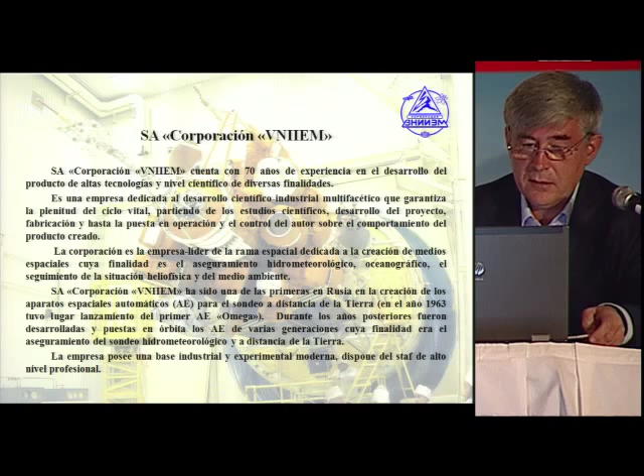This brief history of our company can be seen on this screen. In the very first years of space exploration, when our country was making first tentative steps, VNIIEM, as the chief organization, actively participated in the development of electrotechnical equipment for the rockets.

For instance, we participated in the development of the famous rocket R7, which was used to launch the first artificial satellite of Earth and then the first piloted spacecraft Vostok.

Owing to that success, our VNIIEM had to build the first meteorological satellites. The first such satellite, Cosmos 122, was developed by our company and launched to orbit in June 1966. In 1967, two more meteorological satellites were launched, Cosmos 144 and Cosmos 156.

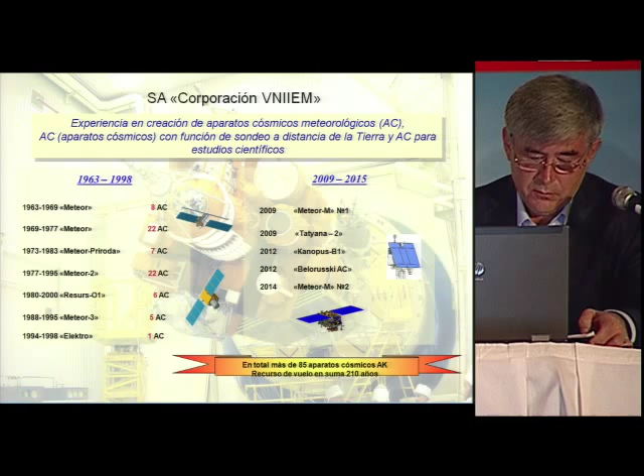In the past few years, we have accumulated a wealth of experience in developing and launching new satellites. We have launched a total of more than 85 satellites. The overall flight time of all our satellites amounts to more than 210 years.

On this slide, you can see our satellite Meteor M2, which is at the moment on orbit. It was launched a bit more than a year ago. It is a meteorological satellite, and it is equipped with a full complex of meteorological and scientific research equipment.

It is designed to acquire information about global and local cloudiness, snow cover in visible, infrared and shortwave bands. It helps acquire information about the temperature of marine water, information about the ozone layer and heliophysical information, and a whole complex of additional information that helps us better forecast weather.

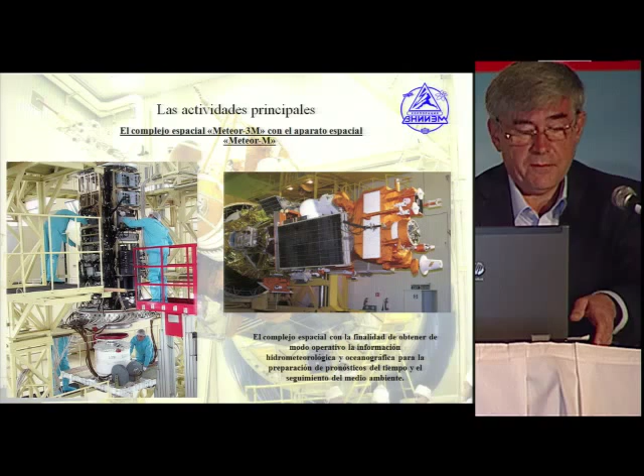On this slide, you can see a satellite. To your left, you can see the satellite at one of the assembling stages. On the right, you can see a completely packaged satellite before taking it to Baikonur.

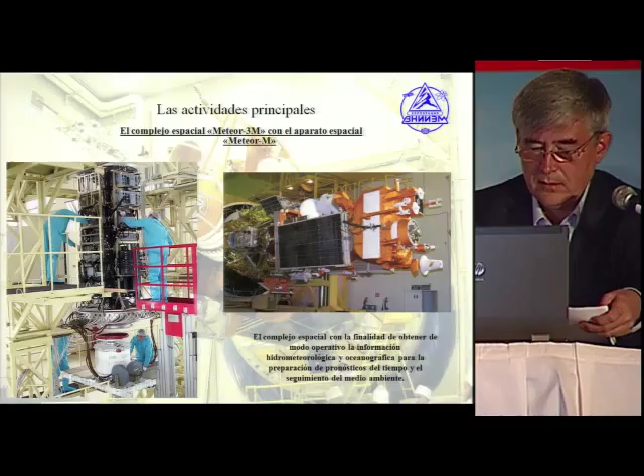It was repeatedly mentioned here, Kanopus-V, and our company is not participating at this conference for the first time. In previous Rakurs conferences, and maybe in subsequent presentations, you will hear more about how to use materials acquired by Kanopus-V. My colleagues will tell you more about it.

I just wanted to note that the principal tasks that can be performed by the Kanopus-V would include mapping, land use, monitoring, agricultural assignments, natural resources, technogenic and disaster management.

For instance, it was mentioned, I think 2 years ago, when we had a catastrophic flood in the far east of Russia, the materials acquired by our Kanopus-V satellite were actively used both by the Ministry of Emergency Management of Russia and Rosgidromet, and they were highly appreciated in terms of their quality and in their capacity to forecast disasters and emergencies.

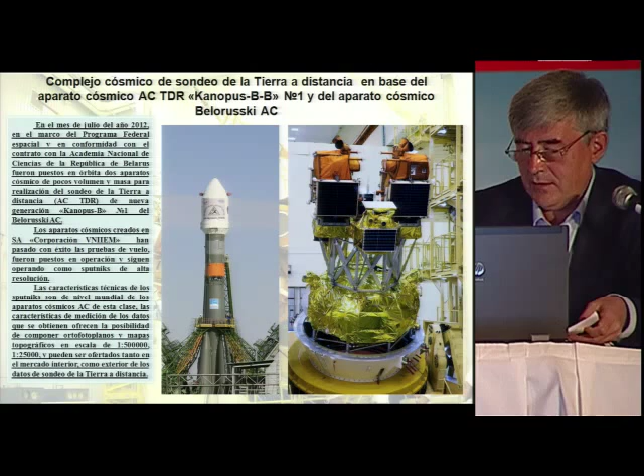To the left is Kanopus-V, and to your right is the Belarusian Satellite. I will tell you more about the Belarusian Satellite a bit later. You are aware of its characteristics already.

They were mentioned previously. There are two cameras, panchromatic cameras mounted on it, and they also have multispectral bands. The swath is up to 23 kilometers, and the precision of geo-referencing using orbital data is 30-50 meters.

These satellites have been in use for 2 years already, so they were not only tested, but in real operation the accuracy proves to be higher, at 4-7 meters.

Another thing to note is that this satellite was developed and built in a small form, lightweight. The overall weight is 470 kilos. Perhaps it's unprecedented for Russia when we built a small remote sensing satellite with such specifications.

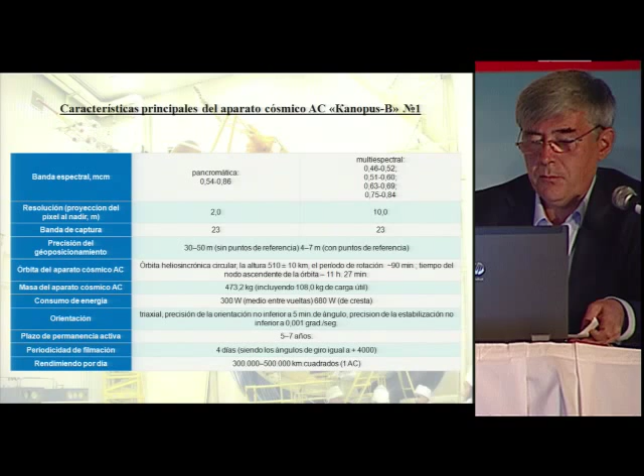Capacity-wise, this satellite can acquire up to 500,000 square kilometers per day, which has been confirmed by the successful operation of this satellite in the past few years.

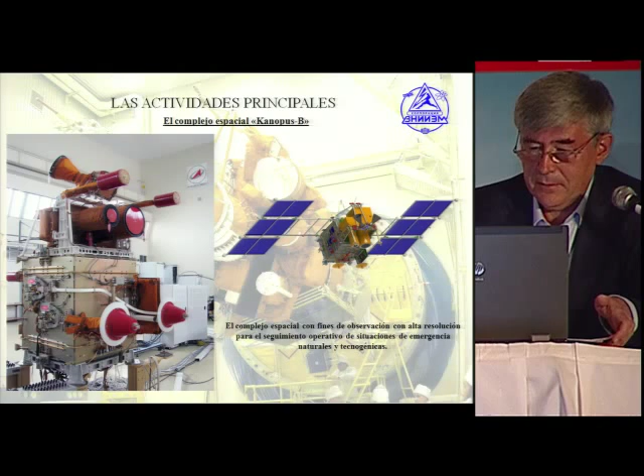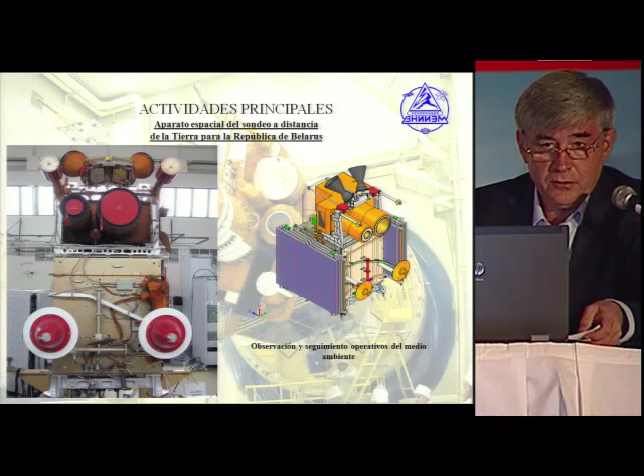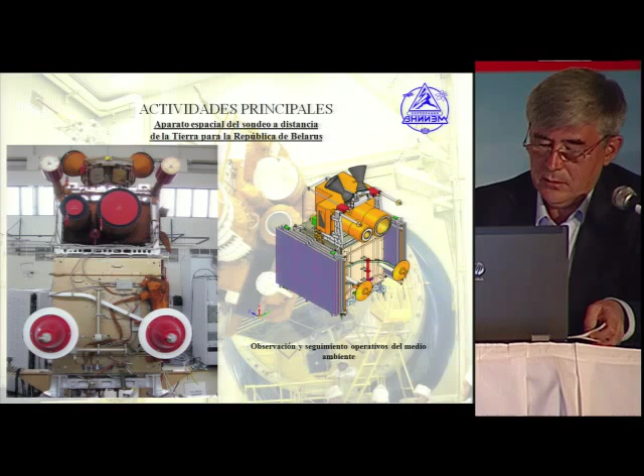Mount at the final stage of the assembly. At the same time, we developed and launched a Belarusian satellite. The work was done based on the contract signed with the National Academy of Sciences of Belarus. Simultaneously with this satellite, we developed and supplied the ground segment, which includes the ground flight management complex and information reception and processing complex. We trained specialists in Belarus, and now our Belarusian colleagues are successfully operating this satellite.

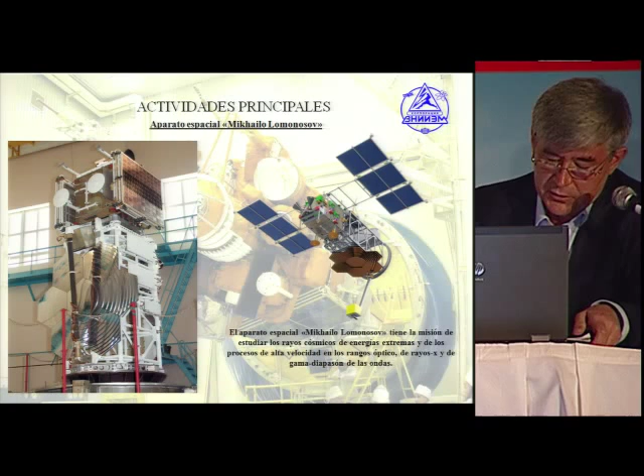Our company is actively cooperating with different universities and institutions upon the request from the Moscow State University. Now we have already built a new satellite called Mikhailo Lomonosov, dedicated to the memory of the great Russian scientist, the forefather of Moscow State University. This satellite will be used for different scientific experiments and research, mostly to study different phenomena in the upper strata of atmosphere.

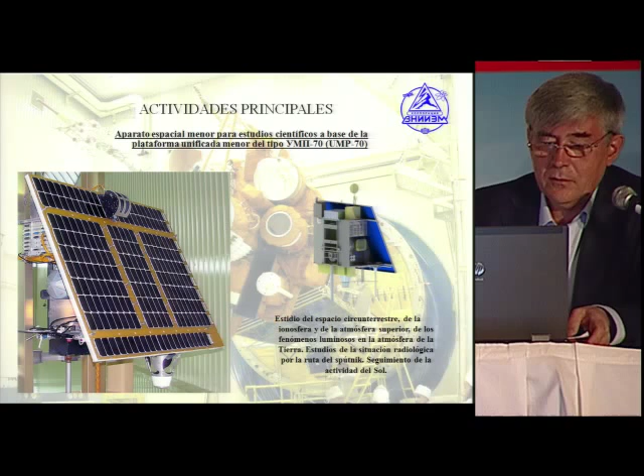This is another example of good cooperation with Moscow State University. This is a small size satellite called Tatiana, named after the student day or Tatiana's Day. There is this holiday in Russia. It weighs only 70 kilograms. It was designed and assembled by students of Moscow State University in terms of equipment. And in terms of the platform, another youth team was put together which did the project. So the satellite was successfully launched in 2009, and it performed all the tasks attributed to it.

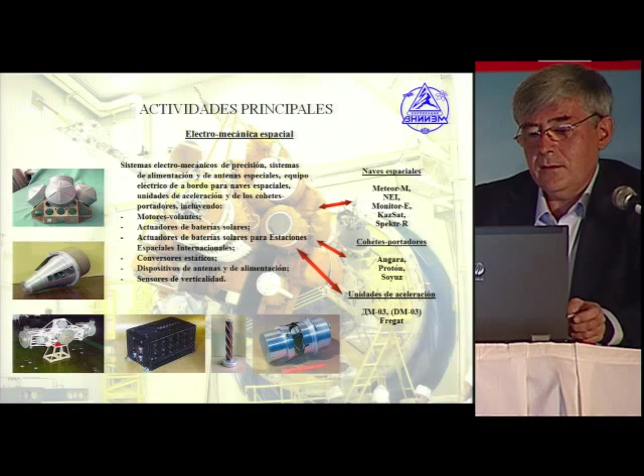My company is engaged not only in design and development of satellites. We are a multitasking enterprise, and one of the areas that we cover is development of various electrical and mechanical systems, such as flywheels, motors, antenna feeder devices. All of these devices are designed and installed on our in-house satellites, as well as satellites manufactured by other enterprises under the Federal Space Agency.

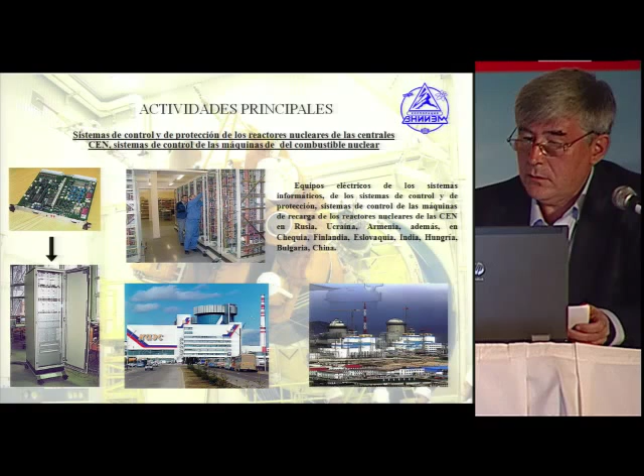We're also a world leader in designing, creating, and implementing nuclear reactor physical protection systems. We have been doing this for over 50 years. We're the top leader. Our posters and stands are installed in a vast majority of stations around the world. You can see some of the text has been translated into Spanish.

We're also one of the best in creating magnified, enhanced electromagnetic ball bearings. How does it work? The rotor is hanging in a field, a magnetic field. It does not require lubrication. It's like a perpetuum mobile. And the capacity of such units may reach 50 megawatts.

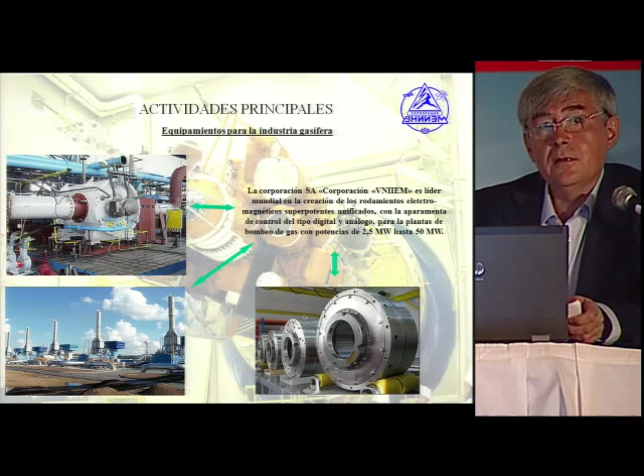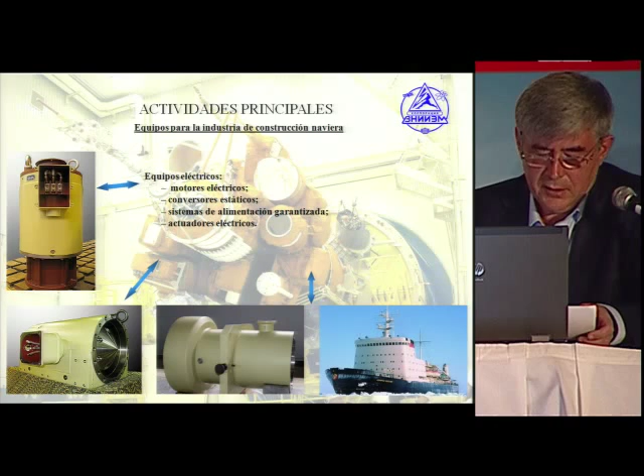It is used by Gazprom actively to pump gas, to provide the required level of pressure in pipelines. Also, another area we do is designing electrical engines, power supply systems for ship navigation.

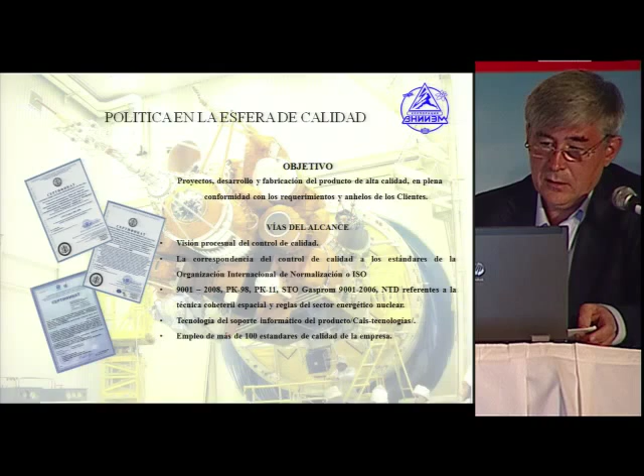We pay a great deal of attention to quality of the product. We've developed a quality assurance policy. The key objective here is to ensure quality at all stages, from designing to production. We are a testing facility.

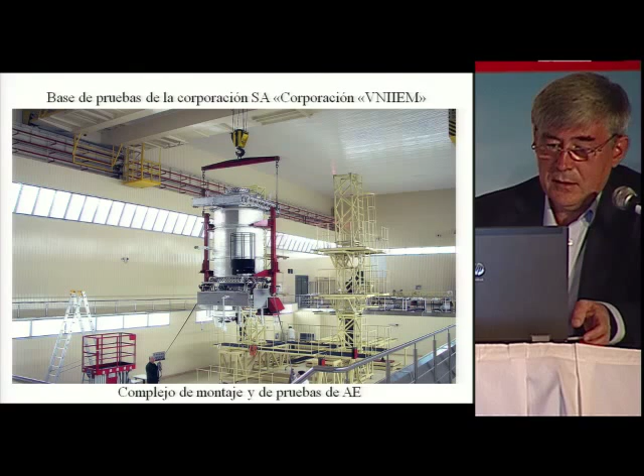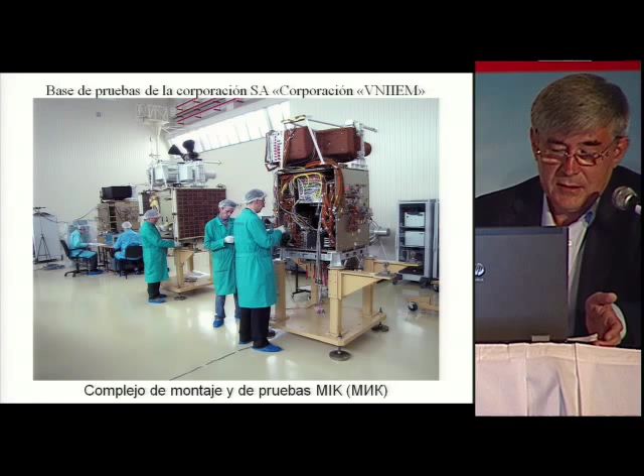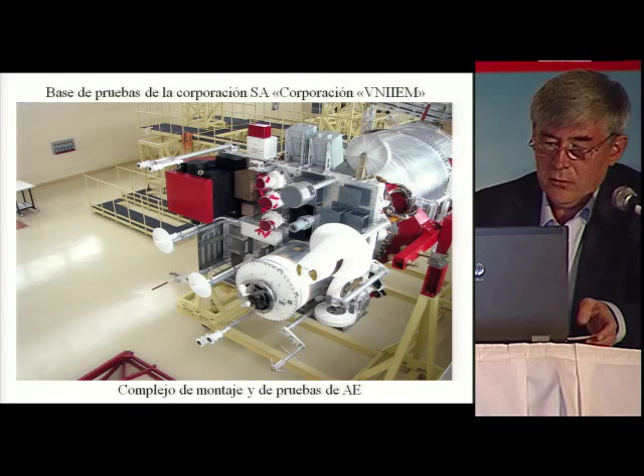There is a couple of slides here about our production capabilities. This is our assembly and testing facility, a big room to assemble large satellites like Meteor. You see the people, how small they are next to the satellites. And this is how Belarus satellite is being put together. This is the actual size. This is VNIIEM satellite at one of the final stages before being transported to Baikonur.

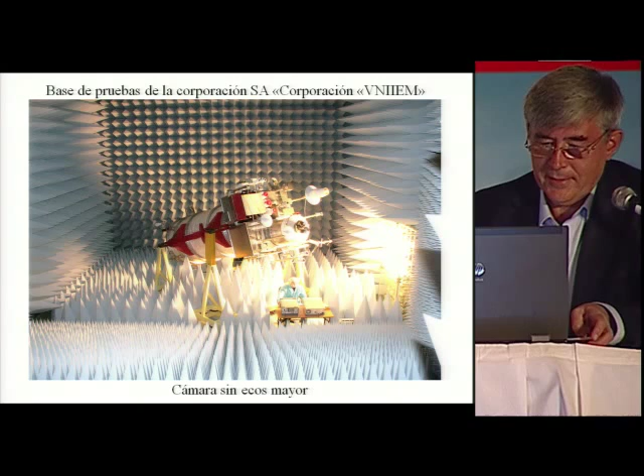There's a large echo-free chamber where satellites are put inside to check their electromagnetic compatibility. Indeed, this is a huge chamber. Meteor satellite is big and heavyweight, but it looks here like something very small.

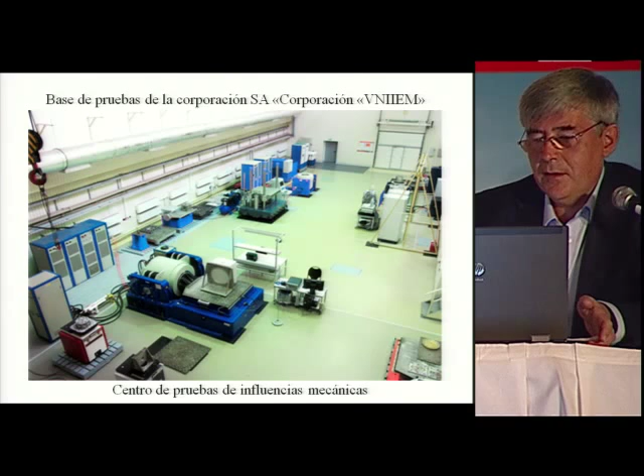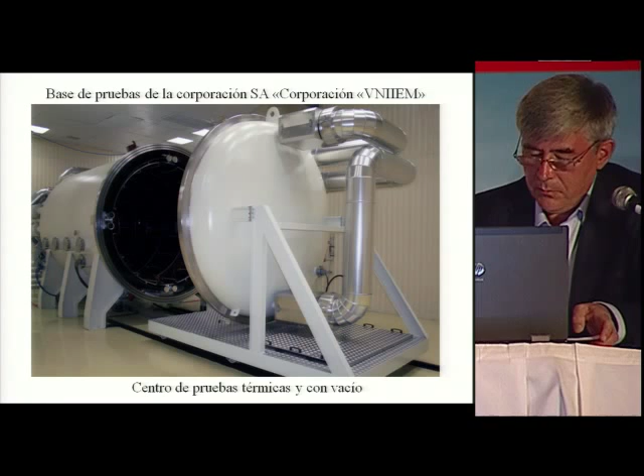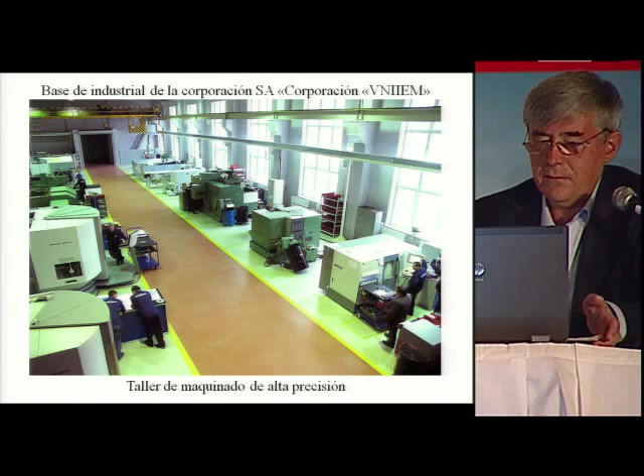We are actively engaged in international cooperation in a range of fields. So we used to say that we operate for companies from Gazprom to space. So all of these things are covered by our enterprise.

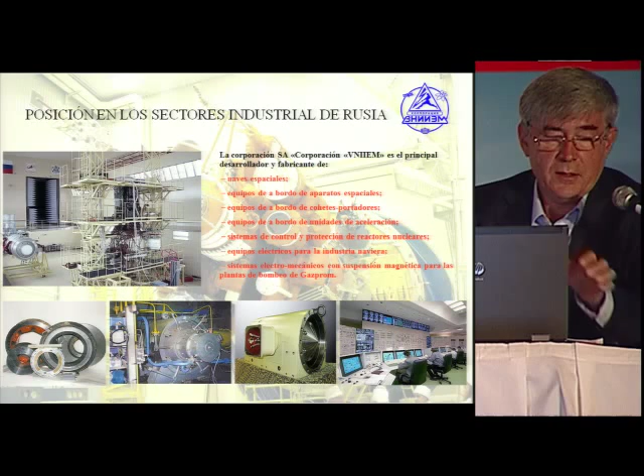Why did we decide to familiarize our colleagues with our enterprise in greater detail? This is not the first time we participate in the conference, and it seems to us that it would be deemed appropriate and expedient for software developers to know more, or have deeper knowledge, about satellite designers, because at the designing stage of a satellite or its components, we are fully aware that what we do is evaluated vis-a-vis the imagery that our satellites are able to capture and acquire. So maybe at this very stage, designing and development, we need to have more cooperation with our distinguished colleagues. There is one thing I overlooked.

When I talked about Canopus and the Belarusian Satellite, which will soon celebrate 3 years in orbit, I wanted to add that these satellites have now been separated in one plane. They created a space system operating for the benefit of two countries. In the next 3 years...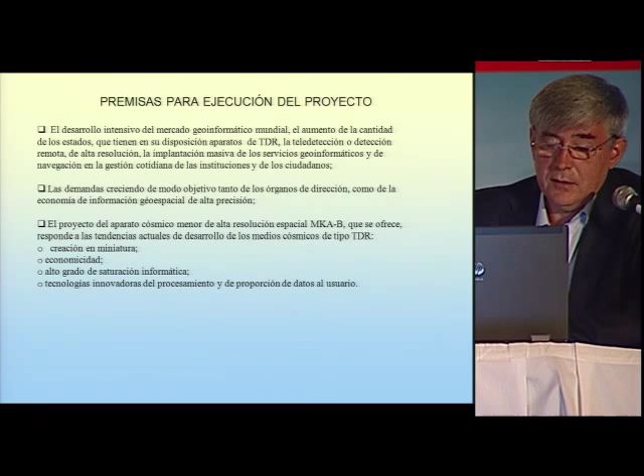Since our policy has now shifted towards small satellites, when we select masses and weights, we are looking to be able to have cluster launches. This saves money tremendously. I mean, launch cost is brought down significantly. Plus, we're able to roll out and deploy a large constellation.

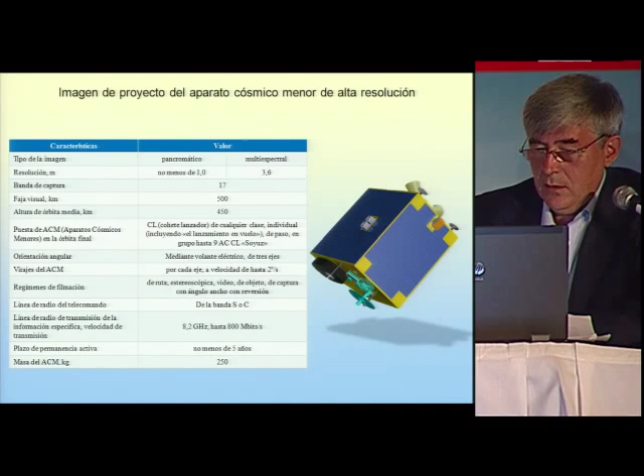One rocket carrier is capable of launching up to 9 satellites. So these are the envisaged specifications: better than 1 meter resolution, swath width 17 kilometers, viewing swath 500, weight no greater than 250 kilograms, service life no less than 5 years, and dimensions 110, 90 by 90 centimeters.

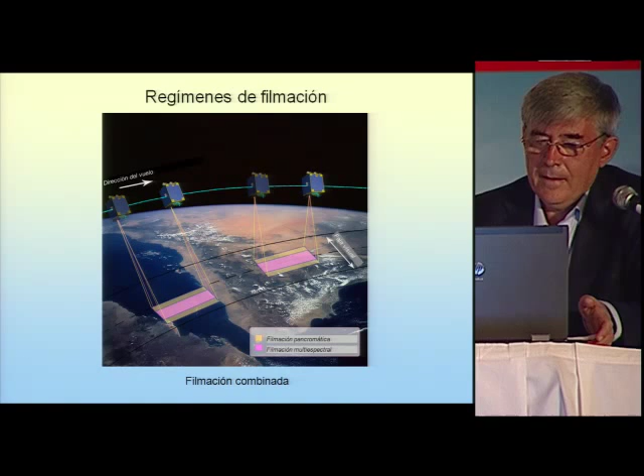The planned imaging modes will be shown now. Based on the platform experience, the platform should provide the standard route survey, frame surveys, arbitrarily directional survey, reverse imaging, which will allow increasing swath from 17 up to 50 plus kilometers, stereo imaging in one pass, and various combos of panchromatic and multispectral imaging.

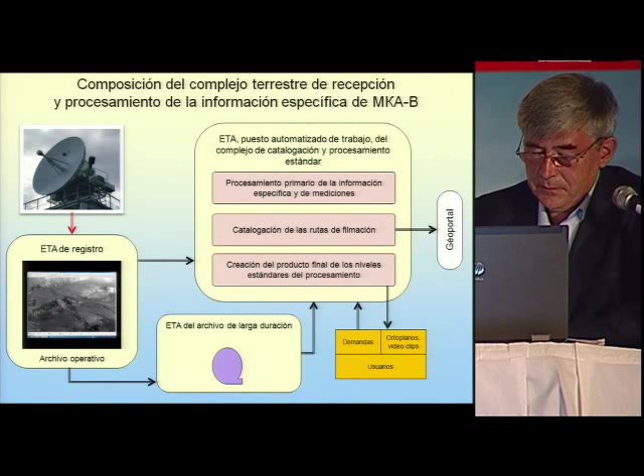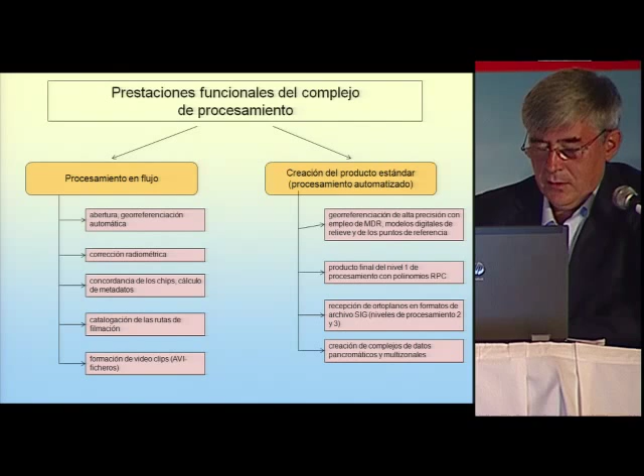Also, with this satellite, we will have created the ground segment to receive and process targeted data. These slides show processing and receiving techniques. They are very familiar to you.

The conclusion is, based on the experience and successes that VNIIEM company has, we now seek to design and develop constellations of small size satellites. This project can be implemented in under 2.5 years. Well, that's all I have to say. If you have any questions, please ask.

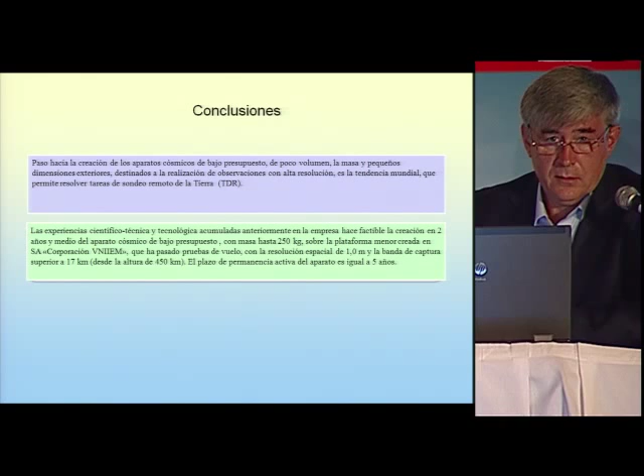Thank you very much, Vyacheslav Arsentyevich. Indeed, a very interesting report. I'd like to abuse my powers as moderator and say that we've always striven to support any remote sensing data emerging on the market, and we are willing and ready to cooperate with you even before the satellite is launched. So thank you very much. Do we have any questions from the floor?

Victor? I have two small questions. First of all, you said that the constellation will finally be created, but I read in the news that the constellation will be cancelled. This constellation will certainly be created in the next 2 to 3 years. Launches will vary, and I can tell you that in the coming years, 6 satellites will be launched to orbit, and it has nothing to do with the cartograph project, no.

I talked to the general director of the corporation, and he promised that you use your own money to launch satellites in orbit, create the ground station, and then you provide other services. Let me elaborate for just 2 minutes. Yes, of course. Yes, indeed, we do have this type of service.